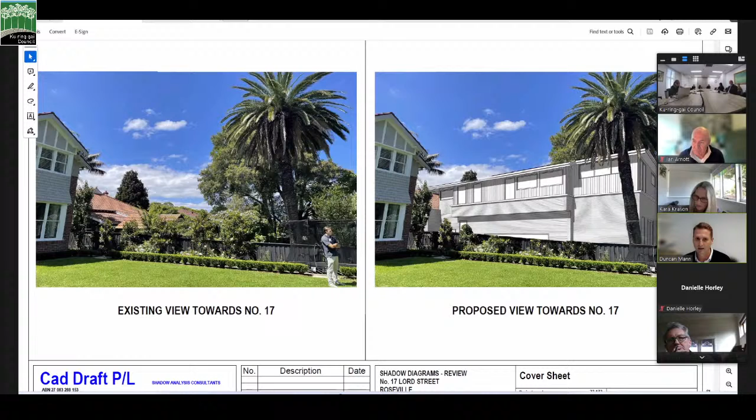Specifically, we would suggest that an approval would ratify that even in HCAs and for properties specifically adjacent to multiple heritage items, only technical setbacks matter, and the overall objectives of the HCA and heritage protections regarding heritage consistency and green space protection do not. Thank you so much for giving us the time.

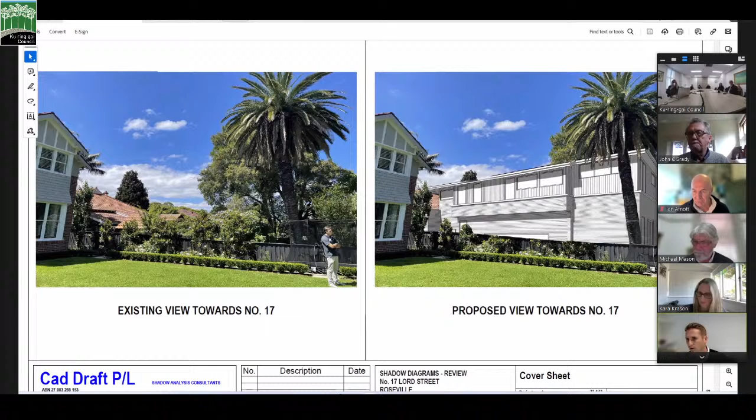I see. And another question: how do you know that has been prepared consistent with the Land and Environment Court requirements for photomontages? Do you know that it's been surveyed? Yes, sir. We also hired an independent town planner who provided a submission alongside this report, and I believe this was done independently, referred by the town planner, and that those parties had worked before on Land and Environment Court submissions, so to the best of my knowledge, sir, I believe it does. Okay, so the photo location was surveyed and then the model was overlaid onto the photograph accurately, as far as you understand. Yes, sir. Okay, thank you.

Well, thank you, Mr. Mann, I just had a couple of questions in relation to that montage. The height of the side fence, do you know what that is? Is it 1.8 metres? Yes, that is a 1.8 metre fence. Okay, so is there a drop from your grassed area shown in those images? Do you drop down slightly? It's more like a 60 centimetre drop. There's a retaining wall behind. You can see the little buxus hedge here; between the buxus hedge and the fence is about a 1.5 metre space, which is lower because of the retaining wall behind that hedge. Okay, well, thank you for that.

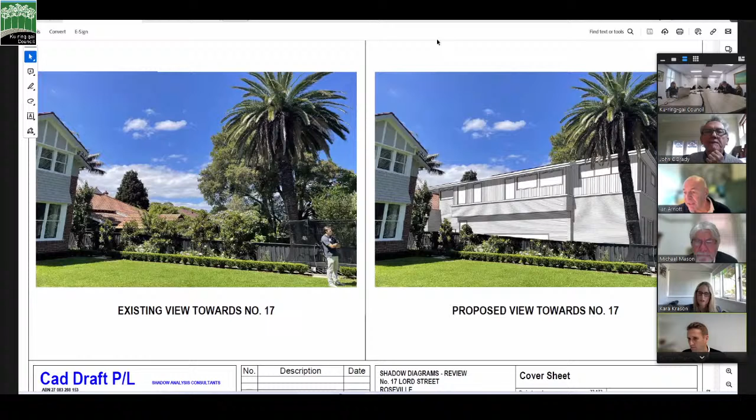Thank you. Could I just ask Mr. Mann, are you able to bring up the shadow diagrams? Yeah, they're in this document, let me bring them up here. Please tell me if you can't see this — oh, sorry, we're still seeing the view diagram, you have to stop sharing that one first. Oh, I can see the shadows now. Okay, please tell me if you can see this.

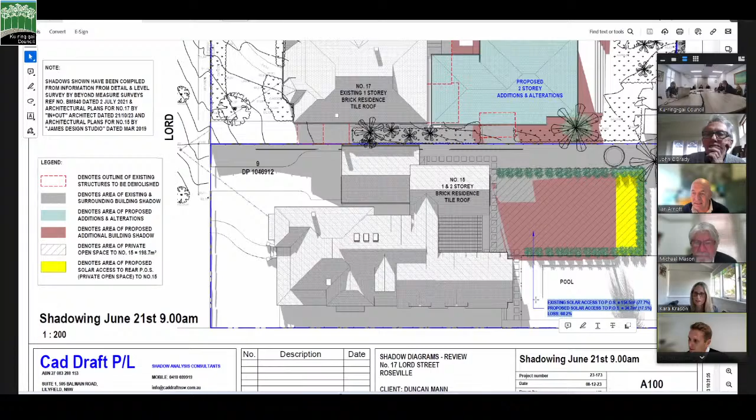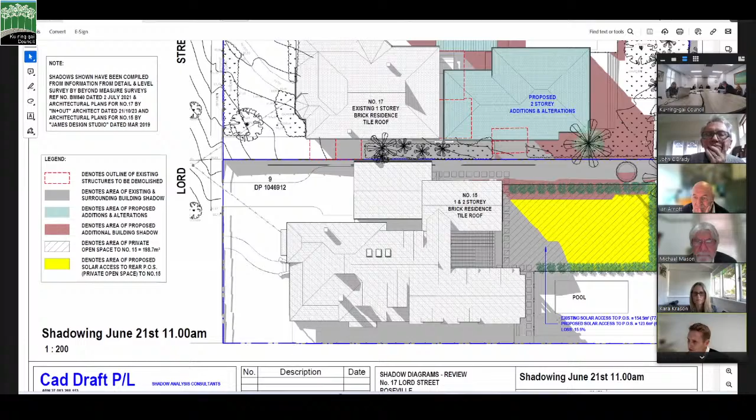So this is at 9 a.m. in midwinter. You can see the grey being the existing shadow diagram and the red being the new, with the calculations in blue regarding the reduction. That's at 9 a.m. Moving to 10 a.m., again you can see the difference between the grey and red, and the calculation of the 38% that I referenced. And this is 11 a.m., which is a 15.5% reduction. There is also a diagram showing in the top left corner that it was suggested in the DA there is no impact on our north-facing windows, which is contrary to the diagrams here in the top two.

Oh, you've got elevation. Okay. And so that is showing by 11 a.m. the windows are free of any shadow, but at 9 a.m. fully covered, and at 10 a.m. half the rear window. That is correct.

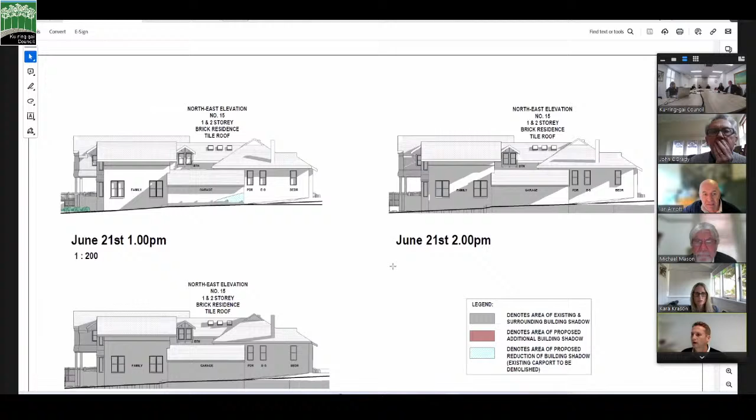And because we're south facing, in the afternoon those windows stop getting their light. So because of the existing shadows, we have an inability to get 4 hours of light to those rooms in the afternoon, and so we rely on that light in the morning, and we're not getting the 4 hours to those rooms.

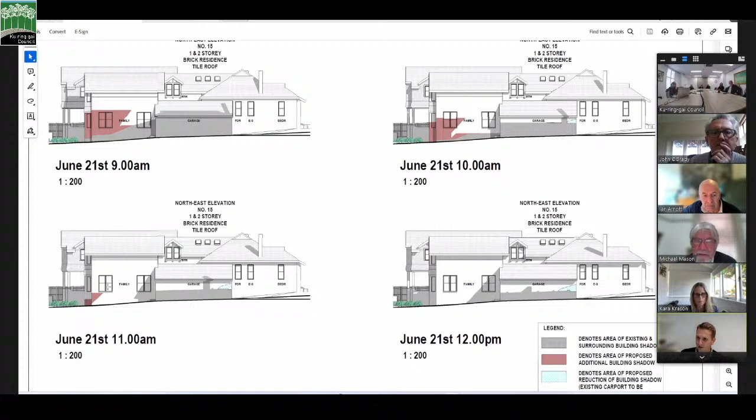Excuse me, Mr. Duncan - what would you estimate the hours of sunlight that the windows do collect? Great question. So by 11, 12, and 1 o'clock, half of that's getting it, so we're getting kind of 2.5 hours thereabouts based on these diagrams, and our experience is consistent.

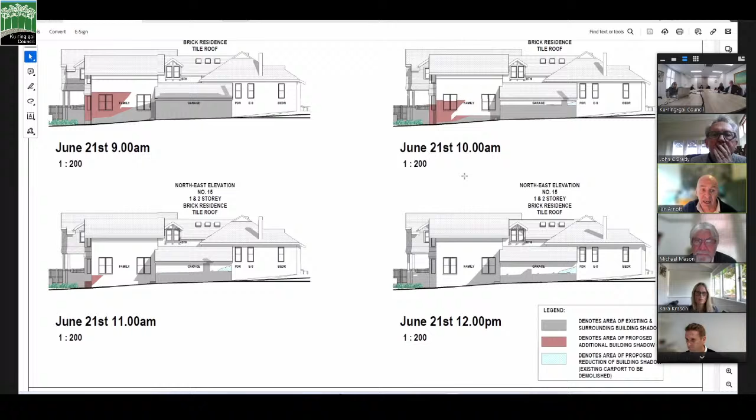Can you just slide back up there? Of course. Well, at 10 and at 9, at least one of the windows is getting some, isn't it? At 10, the rear one is getting - at 9 a.m. it gets a little bit. At 10 a.m. it gets kind of 75%. At 11 a.m. it's getting 50%, and at 12 one window is getting covered but the other one's opening up, versus 1 p.m. where, because of the shadows, it's kind of almost non-existent on both.

And can I just ask a quick question about it? So what are the rooms that those windows access, Mr. Mann? That's in your house? That's our family living area, as noted. Okay, so is it a single room? It's one single room, with windows. Yes, sir.

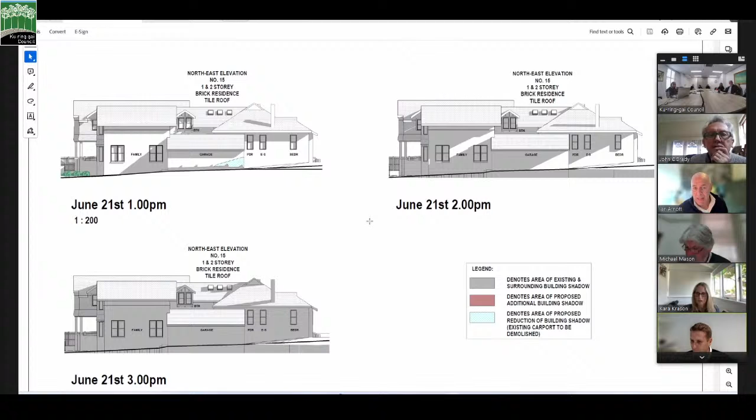And you say you've provided these to council? Yes, sir. Thank you. Okay, well, thank you for that presentation. Thank you, I appreciate the opportunity to speak.